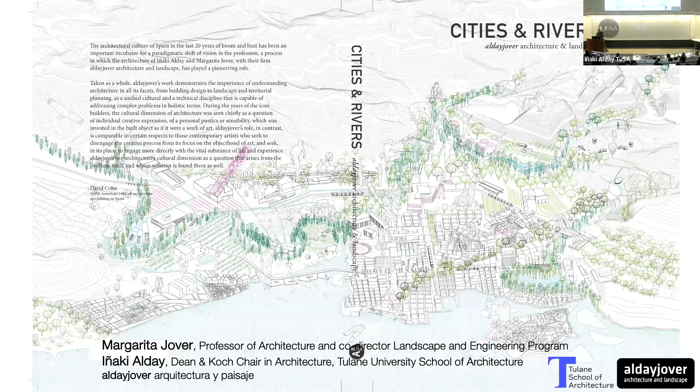Okay, so this is where we are coming from. Margarita and I are complementary in many ways. Margarita is coming from Barcelona and Cameroon, where one of her memories is the space of the sky, the bolt of the sky, how the Central African space outside was covered by this amazing sky bolt. And I'm coming from the desert, very different to Miami and to New Orleans, desert in the center of Spain, Monegros, near Zaragoza, landscape also shaped by water, because this is actually a river, a dry river that is cultivated and with devices to stop the erosion.

We are now in New Orleans in a different climate, very similar. We were enjoying the rain this afternoon. A place with a lot of challenges like Miami, with I think it's probably different that you can have here foundations somehow. In New Orleans, we are in a kind of flan caramel in which everything moves. It's a challenging environment. We have an earthquake every time the trash truck goes through the street.

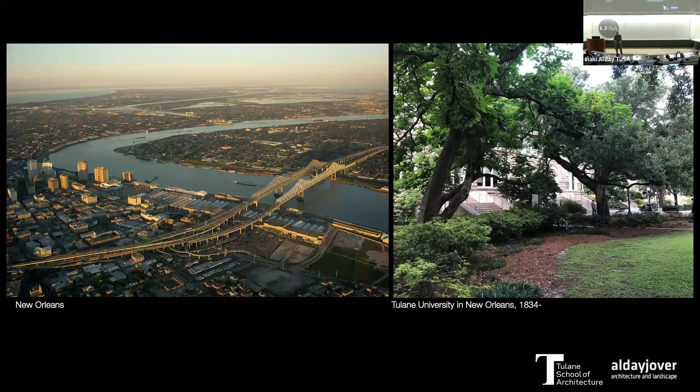And then we teach at Tulane University, a kind of cousin of Miami University School of Architecture. We feel very close. And we keep our practice in Barcelona, in an old palace of the 17th century in the center of Barcelona. Our office is on this level. A very interesting place because it's the only palace in Barcelona in which the family still lives there.

And we are helping in the restoration of all this. So it's a kind of new, changing environment with deep anchors that we don't know yet how it works. And we are very interested in the materiality.

We started as many architects working very abstractly with the offices that we worked for, Margarita Jover with Pepe Llinàs, I with Martínez Lapeña, Elias Torres. But we got very interested in materiality very early on and in getting things built. That's something we have always done. Our work is through competitions, but always ideas competitions for being built, not ideas for the sake of ideas. So the exploration of material, the exploration of structure, and the exploration of programs and programmatic assemblages.

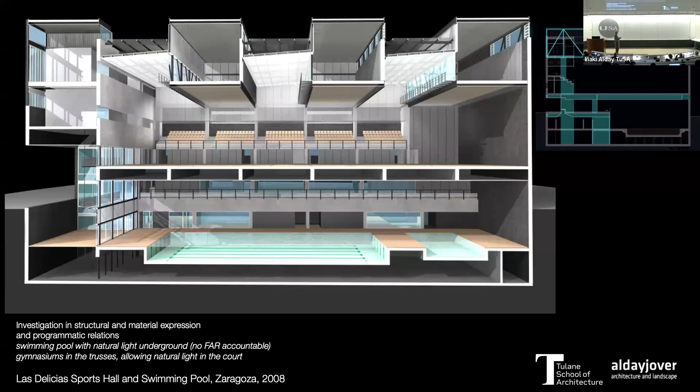This is a building in which spaces are interlocked in order to fulfill the program and the structure. Sometimes exploring and taking risk in structures and in construction.

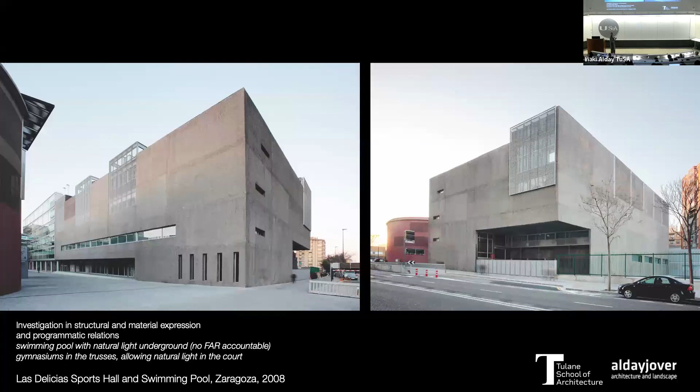This is a very big building. As you see, it's made like almost a model, with very thin feet and a little bit more walls made of concrete, with these textures to create a building that has this size and this presence, with this kind of abstraction with a strong materiality, something we have always been very interested in. And this resonates with our godfather in architecture, a very well-known Spanish architect who is our dream, Alejandro de la Sota.

And this exploration in materiality comes probably from our first project, which Margarita will explain, in the river and the materiality of the river. But we try to work with this materiality in the public space and how materiality in public space is able to organize programs, people, and perception.

So our focus is on this continuity between the building and the public space, and understanding that public space is the place of democracy, the place where people gather together, independent very often of socioeconomic status, the place of freedom.

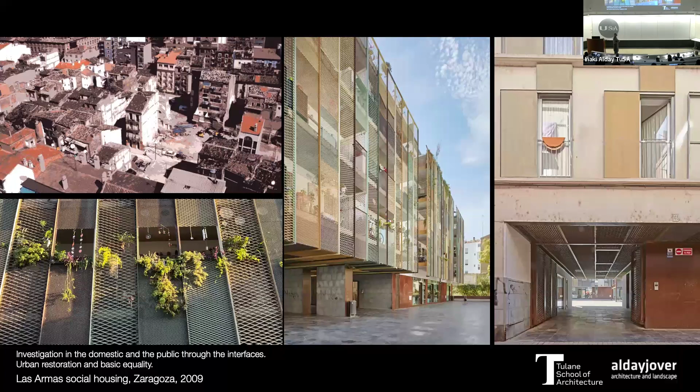We talk about designing chessboards, but we are not designing a monopoly. We are designing chessboards in which you can play many different games. So people are, in the end, the ultimate client of us. Even when we work with a mayor, our client is actually not the mayor, it's the citizens of the city. And often we have gotten in trouble with that.

The other issue that we are very interested in is housing and affordable housing. Early in our career, we did a couple of single family houses, and we decided no more, enough family houses in the world, and that we were going to focus on affordable collective housing. And in some cases with a very clear ambition of exploring the interface between the domestic and the public space.

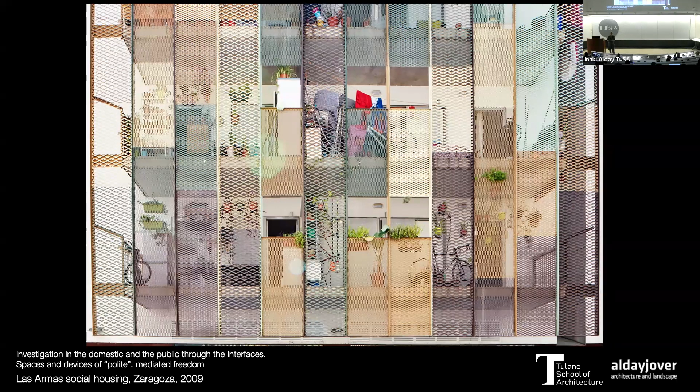So here you have an image of the old part of Zaragoza, a city in the center of Spain, very damaged, very degraded, as you see, and buildings that were going to be filling spaces. And the interior becoming a square, and the relation between the space of the square through this kind of mediation of relation. So we are very interested in how life shows up, but how you have certain control of life in a way.

Because sure, every one of you have a lot of things that do not feel at home, do not fit at home, that you need extra space for. And then you have to put it somewhere. So balconies, terraces, backyards are the places for that. So the effort is how you create something in which people feel free, but are still polite and are still part of this kind of mediated freedom.

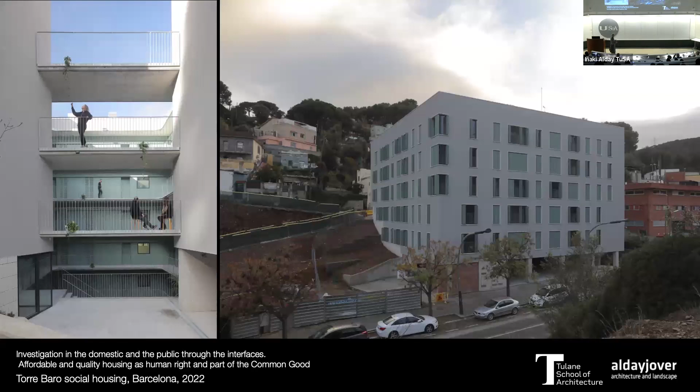So this is one of these experiments on that, or this other recent public house, affordable housing, in which again it was about working and seeing if this works.

It's about working in the public spaces inside the buildings, and how these spaces are spaces of relation. Here you see a little video from Instagram of the day of giving the keys to the new owners, and it's kind of fantastic, because these kids were like, 'Oh, this is our new house, this is our new apartment.' So they were so excited, running from one place to the other. At the end, this is what we as architects, landscape architects, and urbanists focus on.

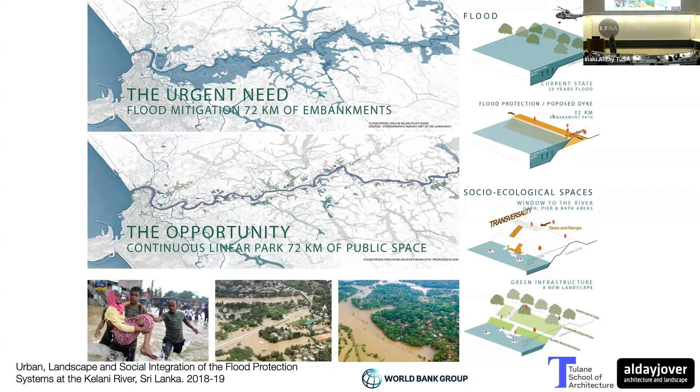Our citizens, let's say. In this work, I'm going through some ideas before entering into projects. We started to work for international organizations. This is a World Bank project, where we are also consultants for this kind of work in public space, infrastructure, and water. We were called because they were doing an embankment, and we transformed that idea into a long linear park for the city because of the problems of infrastructure.

You will see in the projects we explain that we have been working on water and river dynamics for many years since our very first project. So how we can deal with rivers that are, in Southeast Asia, super strong, and how we keep the relation between the people and the river, keeping the people safe — which is something you cannot forget. We cannot be fundamentalist in terms of keeping the integrity of the river. There's the integrity of the river, and there's the people.

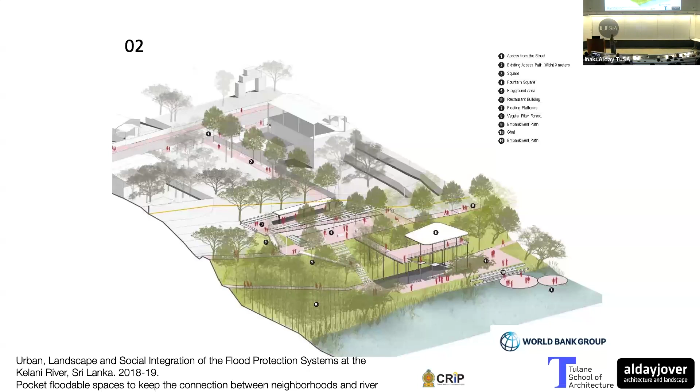So how to find floodable spaces that are part of the community and the neighborhoods nearby, and then how to do urban planning in order to avoid gentrification. The moment you have protected the areas that are floodable, where the most vulnerable people are living, when they stop being floodable, there's going to be a gentrification process. How do you plan in advance for that not to happen?

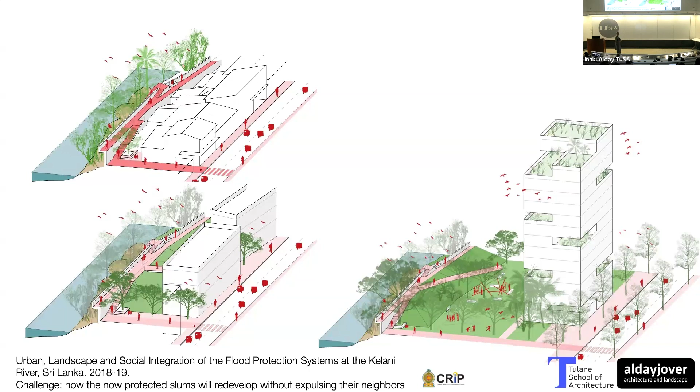These are some of the concerns we're dealing with at many scales, in which the human dimension is critical, because we know we are in a crisis here in Miami and in New Orleans. We know it very well. We deal with it on a semester basis, and we know that the people who are most vulnerable are the ones dealing with the catastrophic effects of storms, of floods, etc.

Of course, many people are dying every year in countries in Southeast Asia, in Africa, but also in Germany, in Central Europe, and all over the world. So it's not a problem that is like, okay, these are poor people dealing with it — we are all in the same issue, no?

So, extreme weather — this is 2016 in Paris, the first time the cellars of the Louvre were evacuated and the artwork taken out. The first time since World War II bombing by German planes that this happened, because the Seine overflowed its banks. So, German bombers and the Seine River — as dangerous for the museum, both similarly.

But these are news from Yellowstone just a couple of years ago. So we are all in the same situation. What we have realized is that we don't have a backyard anymore. We had thrown stuff into our backyard for many years, and now we have discovered that we are in, as Jedediah Purdy describes, a three-fold crisis about ecology, economics, and politics. We've realized there's no rebalancing system — we cannot keep expecting things to go back to where they were. Because we have been using our backyard, and now our backyard is fighting back, and we are realizing what's going on.

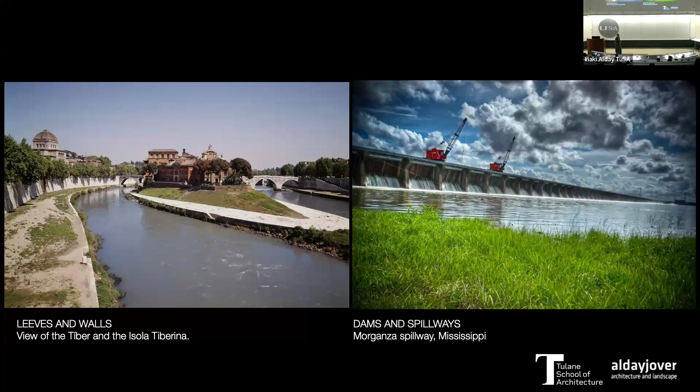The river is the reason for cities to be placed in almost every case, but at the same time it is the danger, the resource, and the threat, the two things together. This is how we have historically dealt with rivers in cities. This is Rome, a river that is walled, an island that looks like a ship, big infrastructures. This is the Morganza spillway in the Mississippi. Huge infrastructures and huge catastrophes. There are other ways to deal with this.

The Dutch have been working on this model, what they call room for the river, for the last 2008 to 2018, with the idea that instead of keep raising the protections, you widen and give more space to the river. That motto, room for the river, widening or increasing the capacity, because half of Europe drains through the Netherlands. The other half of Europe drains through the Danube to the Black Sea.

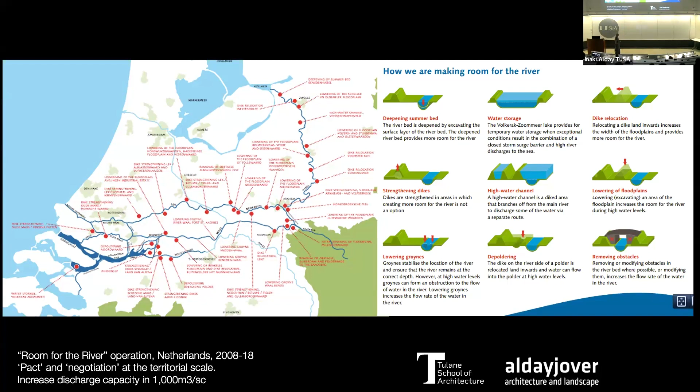So I'm going to stop here and let Margarita take the next.

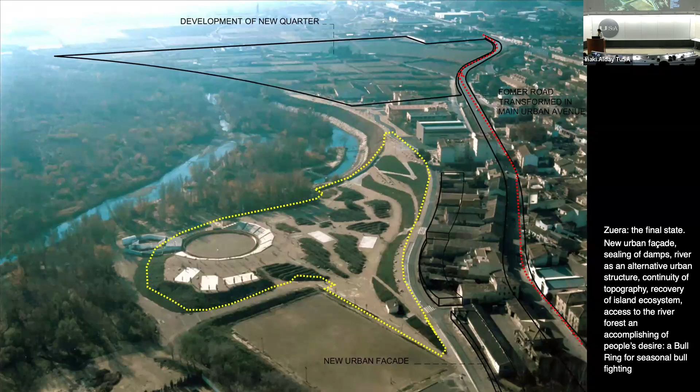All the area along the river was a giant backyard with garbage, washing machines, car wheels, etc. Served by this road you see in red, a series of facilities were placed at the edge between the town and the river. These facilities were accessed from the road in red with their back at the river, a classical situation that occurs everywhere. So the project is then a multi-scalar, multi-temporal set of strategies to transform this backyard into a front yard. Let's go and flow it here.

So the project began in 1996 because an association of bullfighters wanted a facility in the yellow circle, where finally the sport hall was built. We as designers, architects, observed by looking beyond the site at the city itself - doing this typical zoom out - that the plot was almost the only open space available between the town and its river. Building in this place was not a very wise decision for the future. We didn't know what to do, but we knew what not to do.

We knew that responding to the client as service providers to build this bullfight arena on that place was not the right solution. Visiting the site and the city several times, we learned quite a lot in relation to floods, drainage, dominant wind, landfills, sewers, etc. And we decided to propose an alternative location and typology for the building.

So in blue, you see where the rented bullfight arena was located every summer, and in red is what we ended up proposing. Instead of a building with facades on a given plot, acting as an architect who is a service provider for the needs of a client, it seemed more appropriate to propose an amphitheater open to the river dynamics without facades. This obvious solution took 5 years, because we had to convince them to tear down dikes, etcetera, and to integrate this building into the restoration of the entire waterfront of the city.

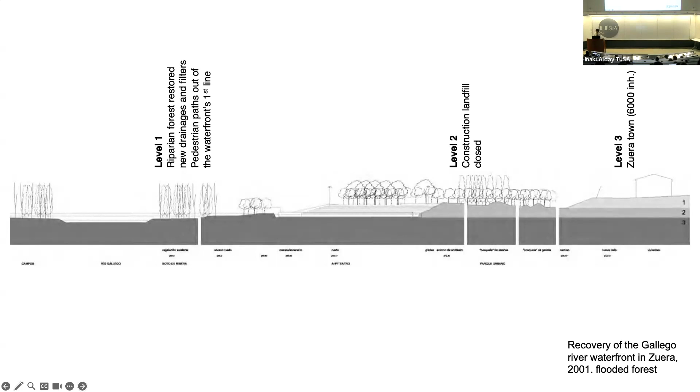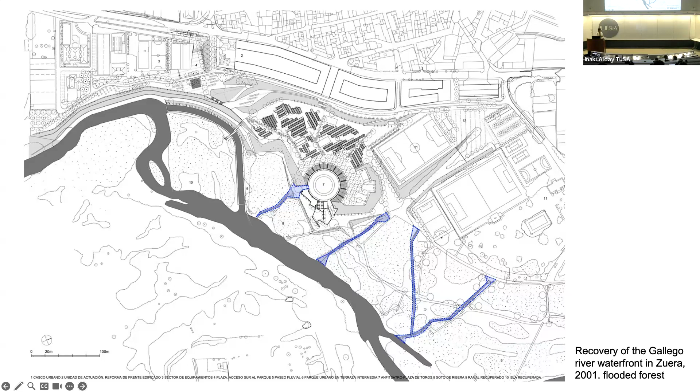So these drains are draining towards the river, and they are planted with filters of trees that reduce the energy of the flood as it comes down, in the image from bottom to top.

In those seasons it gets flooded, offering a lake to the park's users. And of course, in summer it is the receptacle of corridas and bulls and toreros, as we've seen already in the previews.

So looking at architecture as part of the territory means to understand well urban issues, topography, drainage, the water cycle is critically important, and the social agents that operate within. So people's dreams and resources and natural dynamics and the very matter of life.

So for this project, cohabitation with floods in a productive manner was our aim. I wanted to highlight here a piece of text written by bullfighter, artist and painter Luis Francisco Esplá, who writes in the book, in his essay, that he's obsessed with balance.

He started as a bullfight person playing with karate and judo, and he was obsessed with balance and this idea of the relation between humans and animals and this intuition of balance.

In this text he says: if I have started out by speaking of balance, it is because with this intervention, where the tremendous allegorical charge of its elements would guarantee serious conflict in advance, the voice of Solomon calls into being the harmony of a perfect braid, architecture, symbolism, and nature. Perhaps the success of this communion lies in the sagacious modesty with which the project is built.

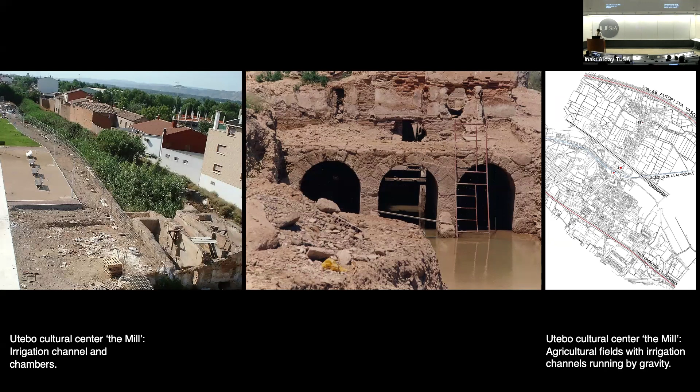It's a place full of irrigation channels that worked for centuries, operating by gravity, just like the flow of water to irrigate the fields. This is the site of this ruined old mill that worked for centuries to transform wheat into flour. Zooming out, we see the town is somewhere in this large agricultural field.

Zooming back in, the competition brief asked to transform the space into a cultural center. The proposal aims to keep the material memory of earth, extending from the old building to the new one and beyond to all public spaces around, making it feel as though the surroundings themselves were excavated into the earth, as you see in the section.

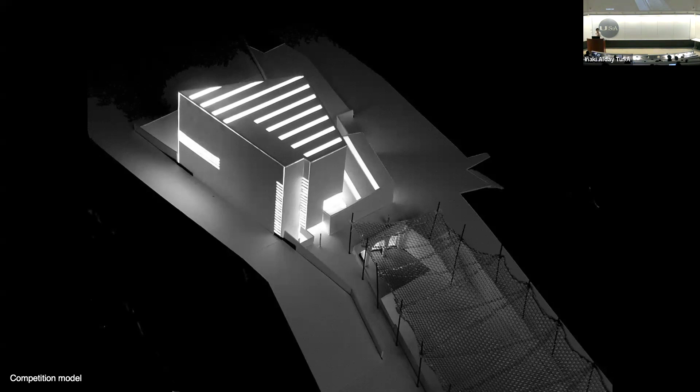The competition model strives to achieve some kind of shy monumentality for this small piece, to make it feel special in a context that is the middle of an urban block full of housing, and it's really small. But the idea of monomateriality and excavation, as if emerging from the earth, makes it, we thought, silent around, by provoking this sense of shy monumentality.

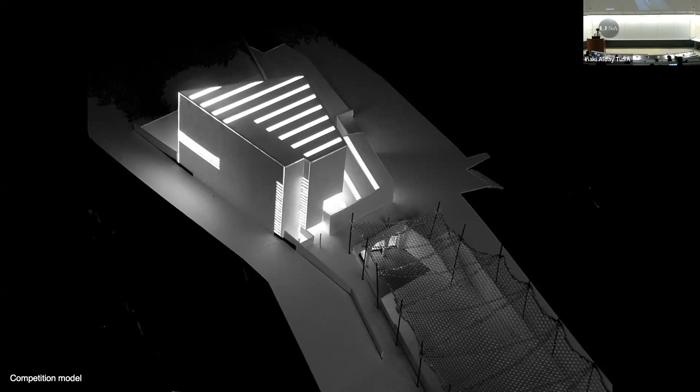The abstract volume takes extreme care in framing windows that are not connected to human scale. So the important aspect here is to have windows that don't reveal which scale it is. A building made out of a massive material, tinted concrete with a texture of canes and high joints, aims to amplify the perception of monomateriality.

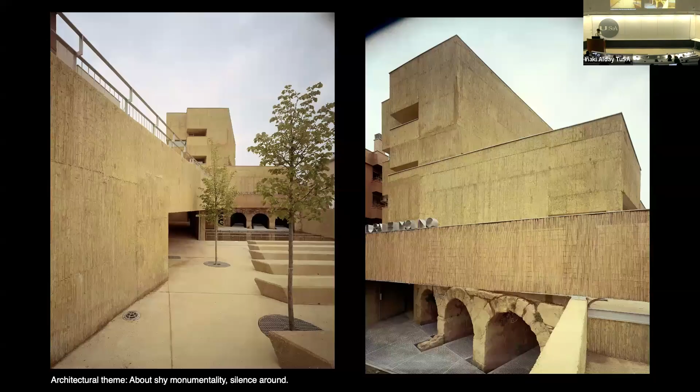As expressed in the drawings too, light comes from the northern orientation, often especially in the roof, with small apertures to save shadowy light from the inside. Windows that are void, again, against the immense scale, attempt to make the perception of scale difficult and preserve its monumentality in a context surrounded by mundane domesticity.

The structure is made of concrete that acts as a shell, making possible the horizontal windows, as you see in this diagram. And from the inside, the building is shiny and smooth, as if the water has eroded it.

And from outside it's like a geode, textured, vibrating with the light of the day, claiming its space in time - past, present, future. Inside you see this shininess, and outside this vibrant set of shadows.

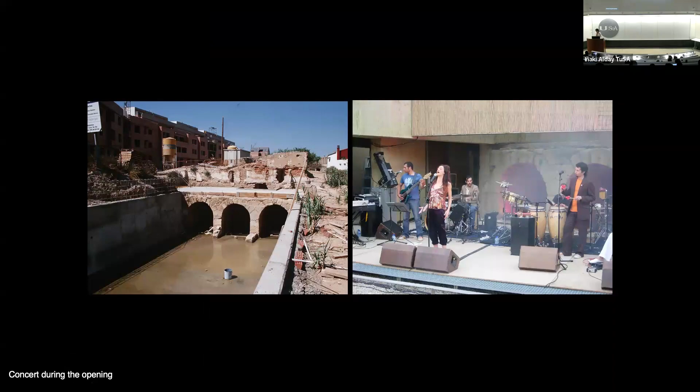So a transformation of the old building, celebrated here on the day of the opening. To conclude with this specific building that is obsessed about marking time, I guess it's the influence of landscape architecture into architecture in our practice, and the role of materiality.

That's from David Cohn, an essay by a North American critic of architecture specialized in Spain, who writes: in Alday Jover's encompassing approach to design, the site is no longer the tabula rasa of the technician. It is a palimpsest replete with traces of the interactions of human history and culture with the natural habitat and the givens of geographic circumstance. Any new intervention simply joins and modifies this accumulated natural and cultural history.

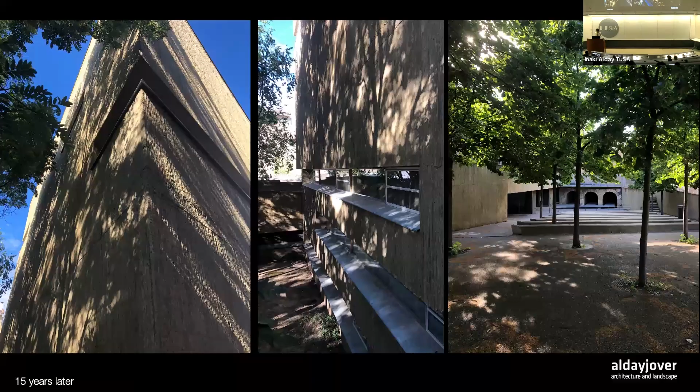Here you have the last slide of that second project, 15 years later, when this forested plaza in front of the old ruin comes alive, because the shadows tell the time of day. The old ruin has fertilized the space around it, making it one piece that has grown in scale and converted this old ruin into a larger, earthy site. So that's the two first projects.

I can hand over to my partner. Thank you, Margarita. We'll continue with another project, the next from the Zuera riverfront of the Bullfight Arena, that was working in...

We realized that our site was visible from a satellite. So we were very scared, because if we messed up, we were going to mess up very big, since you could see the mess-up from a satellite.

But most important, we realized that while the competition was asking for an urban park as part of the city and the International Exhibition of 2008, going up in the satellite made us realize an obvious thing: that this piece is more part of the river than of the city. So our first decision was that we need to give back to the river an important part of it, because it's more part of the river than the city.

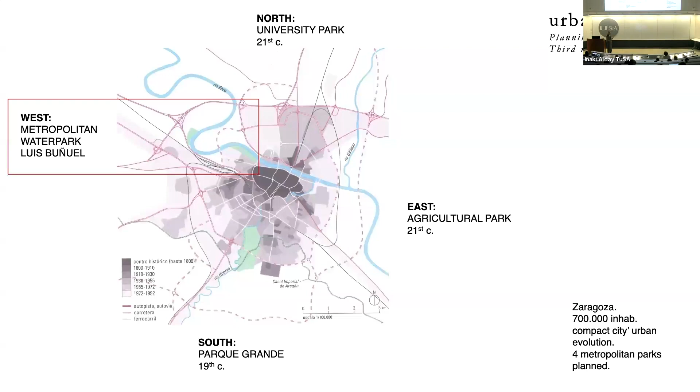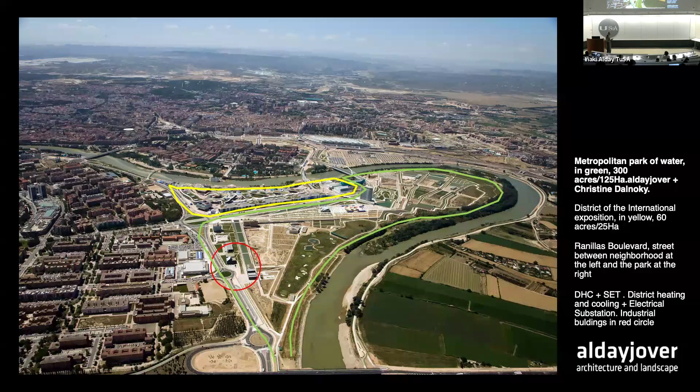This is the growth of the city of Zaragoza over time, and this was the new piece of the meander for the international exhibition. This meander had a road, the third ring, that was stalled, not built, because of the conflict of how to build in this meander. The final decision was that the international exhibition was placed on 1/4 of the meander, while the other three quarters became the water park, this international exhibition associated park that we won in competition—a 300 acre park, a huge piece.

The first thing that we did was think of the project as giving it back to the river, and think that the space of the park was going to be defined by the forest around—what we call the silver forest. Here you see some of the trees that were already there, and the recovered growing forest that is starting here.

It was a very big project, very fast, and we did it in various phases. The first phase was the forest, actually, not the inside. This is in the first year of construction. We finalized this. Everything was messed up in the rest of the meander, and the river was doing maintenance already of that. So all this area was basically given back to the river and to the dynamics of the river. This is an interesting photograph, because it was taken one week before the opening of the international exhibition.

In 2008, one week before the 14th of June, it was a national crisis because it was called the International Exhibition of Water and Sustainable Development, and as you see, part of the grounds of the exhibition are flooded. So it was one week, and all the newspapers in Spain were asking, what are we going to do? The International Exhibition of Water is flooded. It was a national crisis.

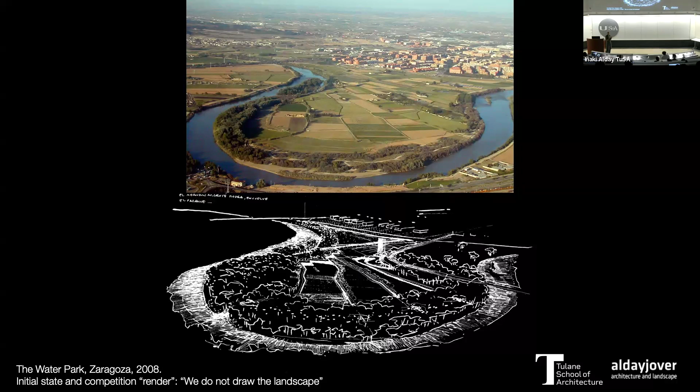So here you see all the traces are still here. Of course, we widened the canals and changed the use of the plots, but all the lines of the territory continue being there, which helped us avoid making mistakes—for instance, tracing canals against the dominant wind. We didn't do that. We kept the farmers' knowledge. They knew. We didn't know, but they knew. Or messing up with the soil.

So this is all the piece that was given back from agriculture to the river, already growing very quickly, and the dike, the main dike of the farmers, that we kept as a structure of the park. Then all the system of small ditches were widened and transformed into recreational spaces, and every one of the plots is now reused as part of the park. A critical piece was to take water from the river and from agricultural ditches and clean it through green filters to be able to use them for recreation and even for swimming. So this is a public swimming pool with water that is treated through the green filters there.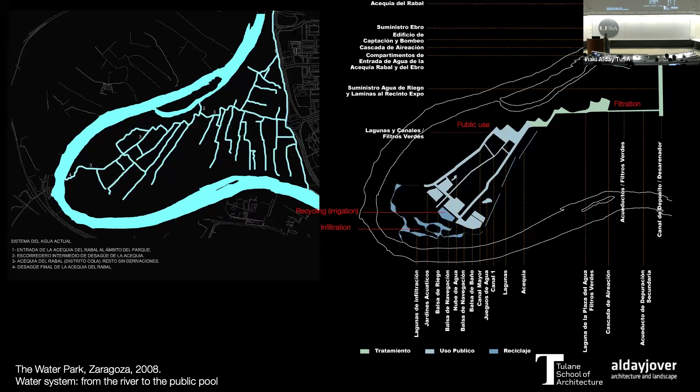So this is the original structure of the meander drawn by the farmers through the ditches and the irrigation, and this is the new structure of a big canal, reservoir, filters, and canals that are now in a wider shape and volume, with some of the plots excavated as lagoons. This is the very simple strategy of cut and fill, from this small ditch to a larger canal to be used by people, and this allowed us to make this simple operation that helped manage the winds.

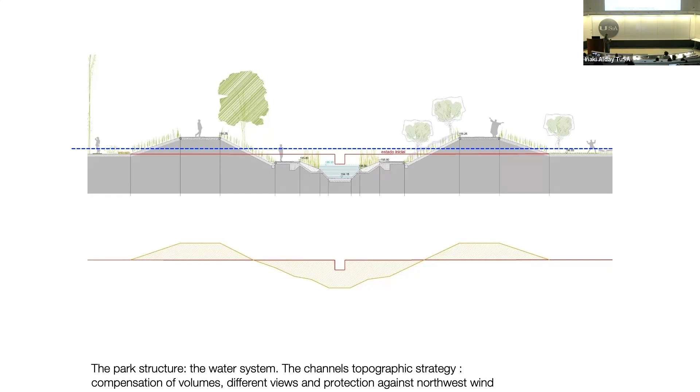The perpendicular dominant winds that are very strong allow you to be protected inside this low ground—spaces of treatment, and this is water coming from the last treatment piece to the usable spaces. Nature taking over bridges and everything.

Plantations keep the quality of the water along the canals. The first time we saw a swan here, we were terrified - what is this horrible plastic swan doing here? We would love to have a nice wooden something instead. But after a while, we decided: what else can you ask for? People are really enjoying the swan, having more fun than with anything else. So please, more swans in the canals. In the end, even if it looks kind of horrible, people have fun - this is why we do this.

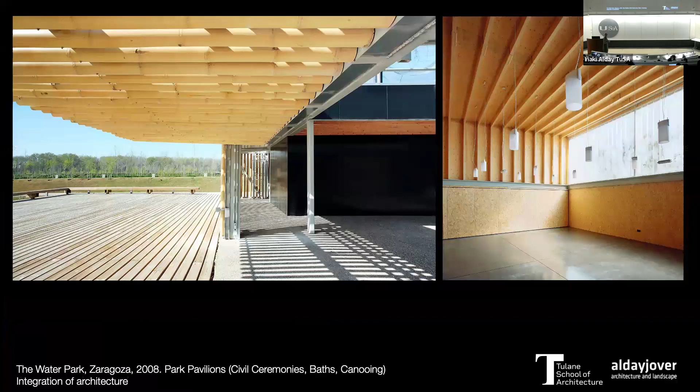So the architecture, we did 8 buildings in this park in just 3.5 years - architecture that is very permeable, very light, allowing water and wind to pass through.

This is the ceremonies pavilion for civic, non-religious weddings, a building built inside the water, inside the floodable area.

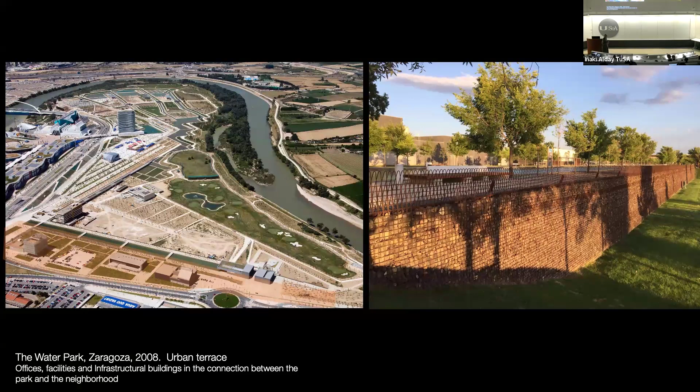So a completely different way to manage the relation between buildings and water, compared to the bullfight arena or the light pavilions. An important part of this was reorganizing the facade in an urban planning operation, with different facilities on top of an artificial terrace mediating between the neighborhood and the park. One of the challenges was that there were several infrastructural buildings, and this was the most challenging of them.

This is a power plant. Typically a power plant is spread across an industrial site with different volumes, and it's typically a problem of urbanity. In this case, it had to be part of the city and part of the park.

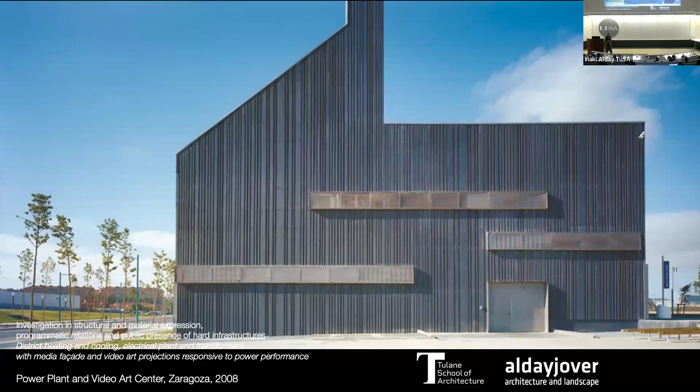So we designed a power plant that could be visited by the public in a safe way, but also function as a video art center communicating with the public and citizens around it. So it's a very abstract building - it could be anything. In this case, it's a power plant with a really fun and interesting program.

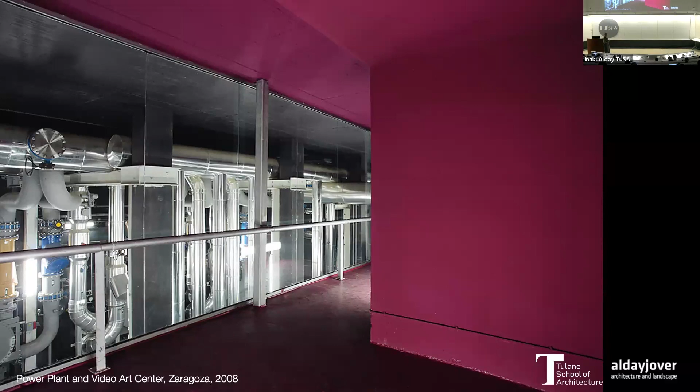It's placed in 3 levels with a huge reservoir half underground, with a safe path for people to visit and see what's going on, because it's part of the neighborhood. There are big heaters like 18-wheelers on the 3rd floor, and an area that can explode at any moment, so it has to be light.

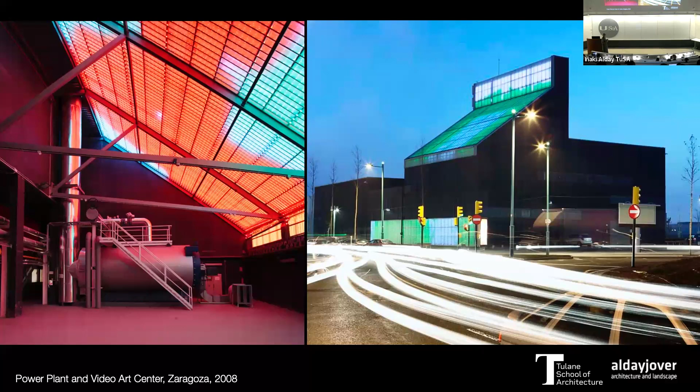This area is a media facade that projects videos - artists make videos connected to the performance of the power plant. This was done in 2008 as well.

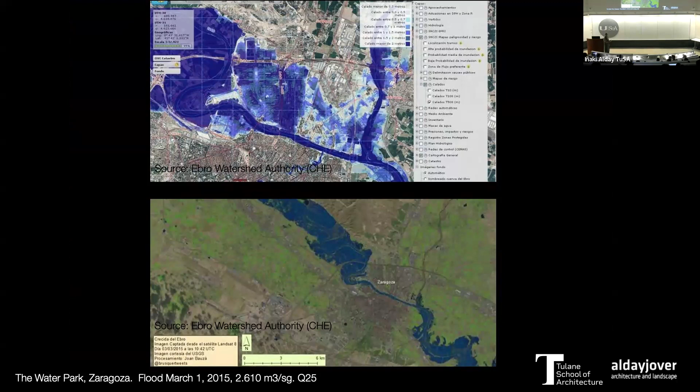We also discovered floods we didn't expect - water table floods, where the area protected from the river floods from inside. These are 10 centimeters over the level of the paths around, and we even realized there were islands forming because of the push of the water table.

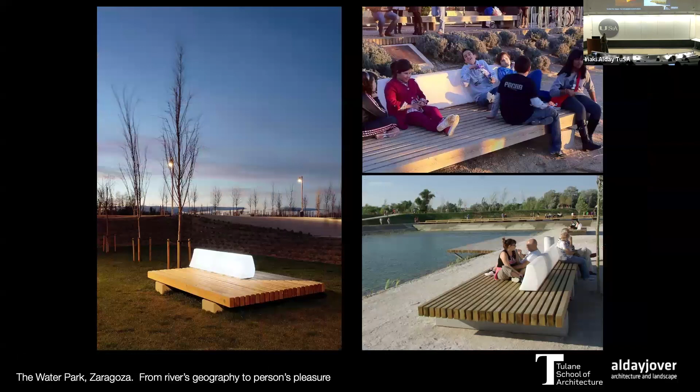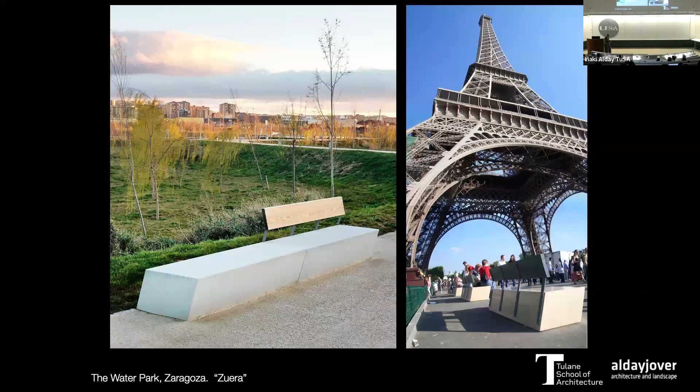But most important, all this is for the people using the park. So when we work in this satellite view with these big floods, we're also thinking about the people enjoying the park. These are the benches we designed for the water park. We call them lovers' benches because this was the area of the city where lovers used to meet before the construction. We also designed some benches for the other project in Zuera that are in the water park, but also at the Eiffel Tower, because the French think tourists are as bad as rivers when flooding, so these are very resistant benches.

We are going to do one more floodable park in Pamplona. This was the third of our series of built projects, and in this case it was a very different situation. We had a river that was very much inside a channel, and an agricultural meander that had become part of the city, surrounded by the city, with a very important value. There's a lettuce endemic to this meander, so it has an enormous cultural value besides the food production.

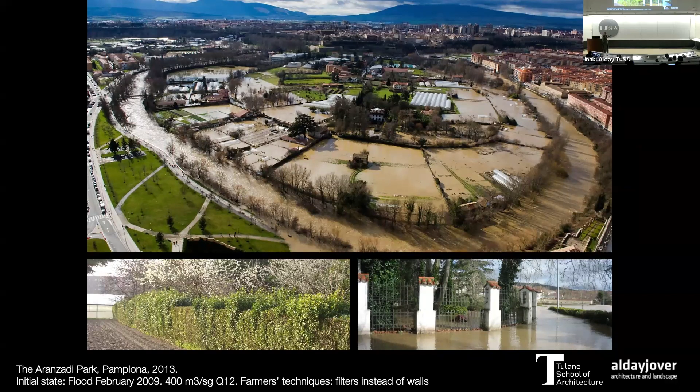We learned from the farmers that you don't want to protect with walls, because once the water goes over the wall, it becomes a cataract, a waterfall, and damages everything. So what they do is create bushes that filter the water, filter the stones, the washing machines, the tires, everything the flood carries, and let the water go through, because the water is actually good and fertilizes the land. We learned that from the farmers there.

We found that this is the original flooding state, backwards flooding, until it goes over the limit of the perimeter and everything gets flooded. The farmers talked about what they call the inner river, a lower part inside the meander. So we thought that connecting the inner river directly to the river would alleviate floods, not only in the park, which doesn't matter, but in the neighborhoods around, because it would give more capacity to the river.

So these are the different scenarios in which at some point the park floods equally. But the critical operation was the creation of this floodable forest, excavating parcels of land in order to protect the most delicate parts at the edge of the meander and to give more capacity to the river. This is the first phase. The second phase, to be finalized here, continues the floodable forest and the protection of the most important agricultural pieces at the edge of the meander.

So we're increasing the capacity, not by widening the river, but by giving it another new, temporary river. This is how it works. As you see, now the second river is in action, is full, and we are diminishing the flood here, but the important thing is what we are avoiding the flood here. That was typically an area that was heavily flooded, so with this extra capacity it changes.

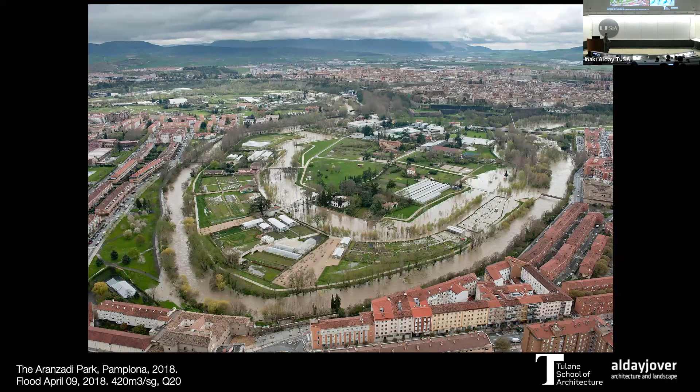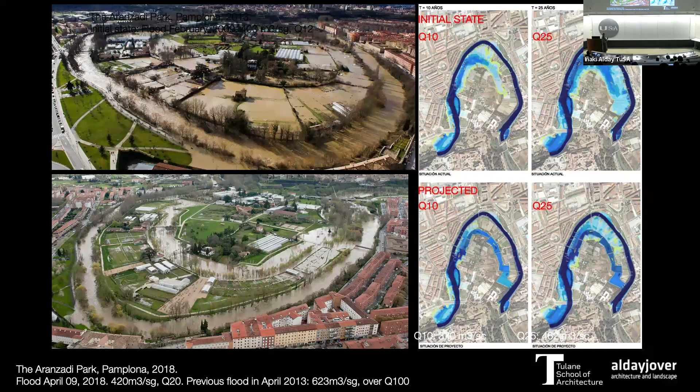So the public space here is again an infrastructure, but not a social infrastructure or metaphorically an infrastructure—it's actually a water infrastructure that increases the capacity and changes this kind of flooding into this new performance of being part of the river. You see the comparison of the two floods side by side. Of course, this floodable forest is for people 300 days of the year. People come here to study, there's Wi-Fi, to have picnics, to hang out, and from time to time it's part of the river.

So when the river arrives at this level, it goes over this and enters laterally along this line. So the design of the bridge and all these pieces is to help the water move, drop all the stones, big trees, and debris like washing machines, because once the flood comes, you're never sure what will happen. But the objective is this: here you see the floodable forest full of water, and the goal is to eliminate flooding in the rest and avoid this situation.

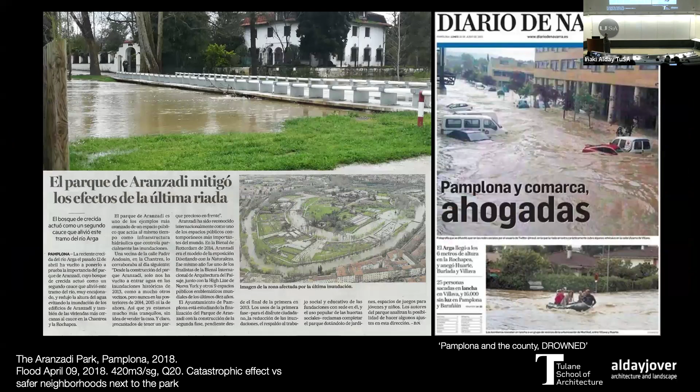We are going to continue with water and projects of public space, planning and infrastructure, Margarita. Yeah, from floods in public space to another type of infrastructure, a metropolitan green forest around the city of Madrid. That's another competition we won, which we did during COVID 2020. The ambition is a green metropolitan forest around the city of Madrid.

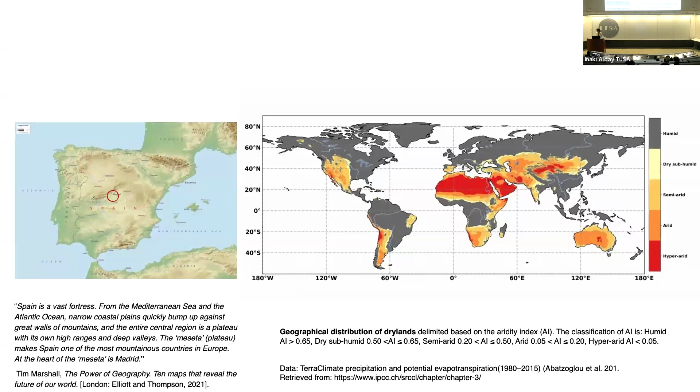To the left, you have the map of Spain with Madrid, the capital, at the center in this red circle, inland in a highland plain called Meseta. The interesting thing is that it's at the foothills of a permanently snow-capped mountain range called Guadarrama. The prospect of climate change in Spain is transforming the country into an increasingly arid one, as shown in the IPCC graphs to the right.

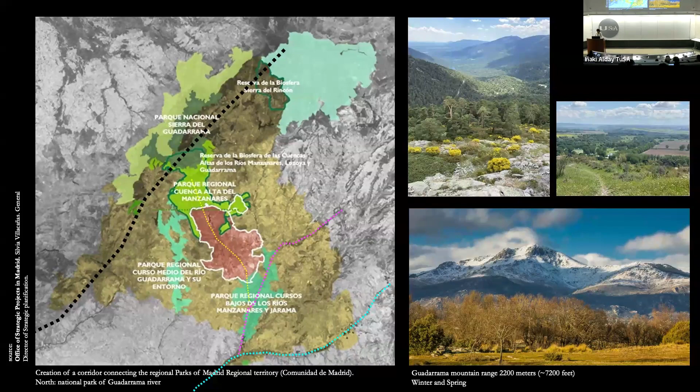So the new green belt is 32,000 hectares, and it's meant to contain the city and connect it with large natural parks around. It's part of the European strategies for mobility reform to decrease CO2 emissions.

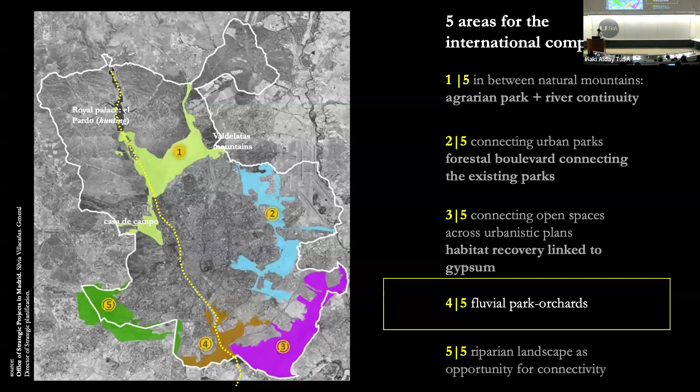If we zoom into the municipality or metropolitan area of Madrid, we see that this green belt has different parts, with different competitions for the different lots. We won number 4, which is essentially what I'm going to explain, this area here.

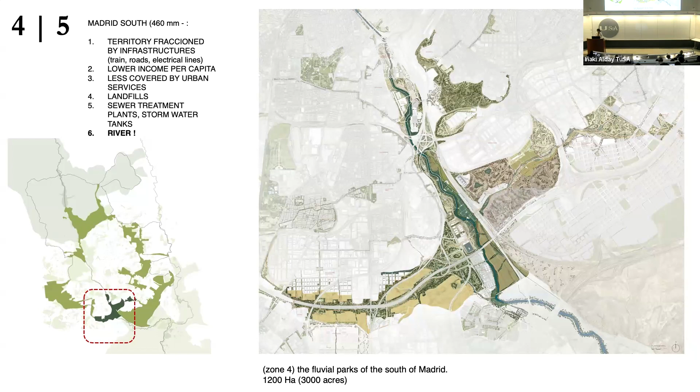The project has essentially 8 basic ideas that move through time across different types of projects - planning, architecture, landscape, etc. They run on different timelines, but the project essentially carries only 8 ideas, shown in this area here. The first idea is that the sewer treatment plants of the city will become new springs that feed the irrigation of this green belt. So the sewer treatment plants are suddenly a big resource of water.

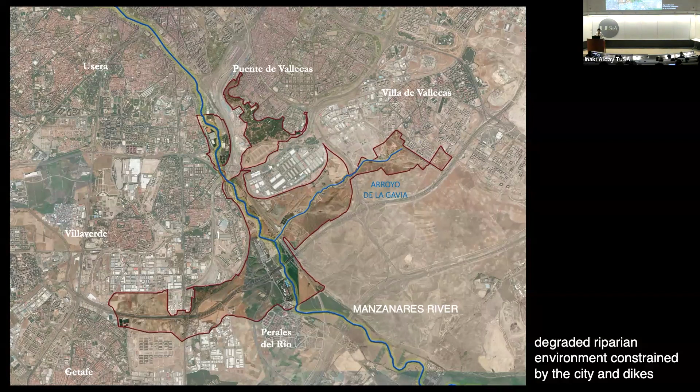In Madrid it rains only 18 inches, as opposed to 64 inches here in Miami, so it's really little rainfall. So how do you make a park without water? The water comes from the sewer treatment plants - that's the main principal idea out of the 8. With that, this regenerated water normally flows back into the river, but in this project, we take part of this water and build an irrigation infrastructure using drip systems that allows the forest to grow over time.

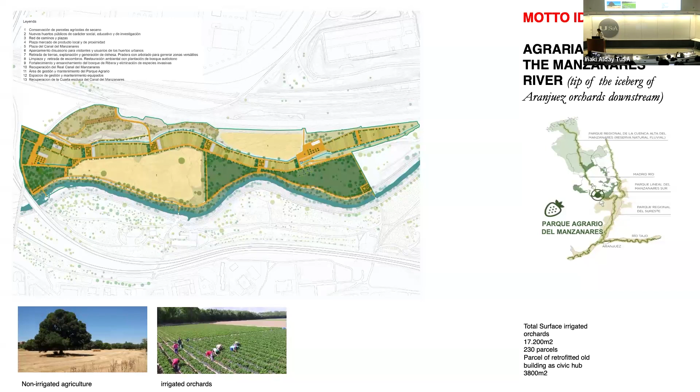So citizens can engage in cultivation of food in close proximity to the city. And that involves recovering old buildings, having new small buildings, pavilions, and things like that.

The third idea, on archaeological and architectural remains, is to restore and recover a big navigation canal of the 18th century that exists semi-sunken there. It was built to navigate upstream the river and connect these large orchards downstream of Madrid to the central markets in the city, and also to connect the city of Madrid to the Tajo River, which connects to the Atlantic Ocean.

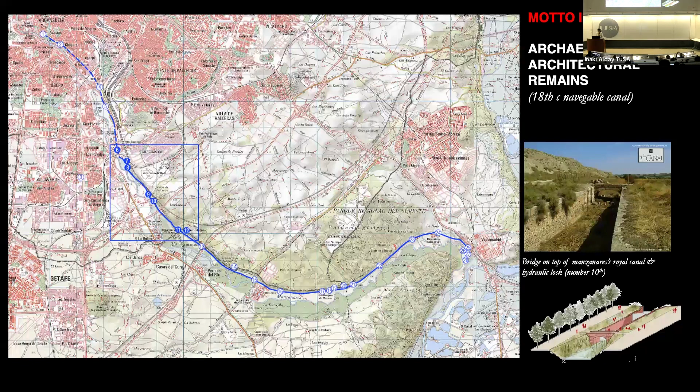The fourth idea is to recover cattle trails and push for slow mobility infrastructure, so people can move with a donkey or a horse from the park to a bus stop, and from the bus stop to the subway, and subway to home. So it's the interface of fast mobility and slow mobility, intermodally integrated, pushing to recover this slow mobility infrastructure.

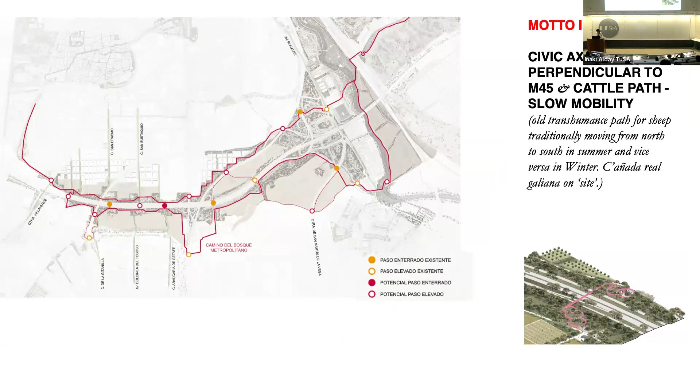The fifth idea, out of 8, is to promote transversality between the ring, which is circular, between the city inside and the forest, transversally, with all kinds of bridges underneath and above the highway.

And the sixth idea is to look for places of opportunity. In this case it's an electrical substation, a place of opportunity reconverted into a social hub with new facilities.

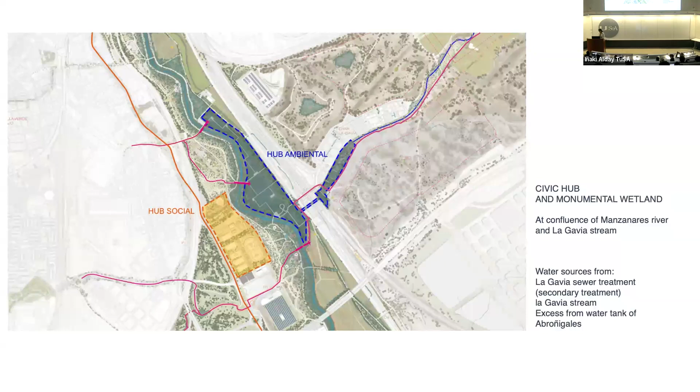Along with the social hub, there's a huge monumental wetland, a new landscape infrastructure that holds water from the sewer treatment plant in an intermediate territory before it reaches the level of the river. So it's a water park for the neighbors, at the metropolitan scale. It looks like that.

The seventh idea, of course, is that we have different teams of people working in this huge forest around the compact city of 7 million people.

So we had discussions among ourselves on how to design this palette of forests that will be more or less homogeneous, determined by soil conditions and access to water. This palette is agreed upon by the whole team, across 6 multidisciplinary teams, to construct unity across the metropolitan forest.

The thing here is to go beyond restoration. So it's not just an ecological restoration project—it's really important to design this reforestation to beg for the citizens' care through the interface of beauty. The framework of plantations and the species provided through the project is critically important to understand, since this is not a natural territory but an artificial one that has cultural values, etc.

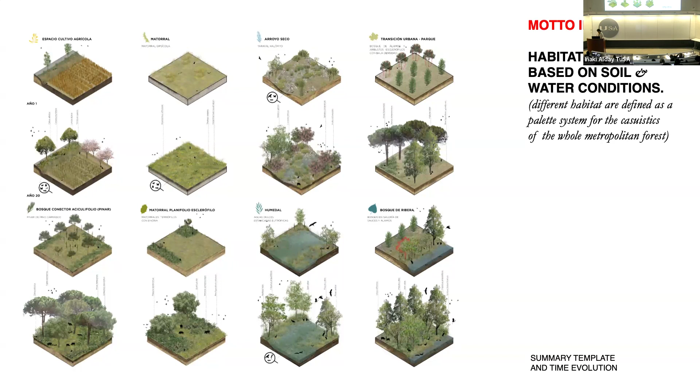So we are in this design phase of the forestation, an artificial forestation with different patches of different forest types depending on the conditions.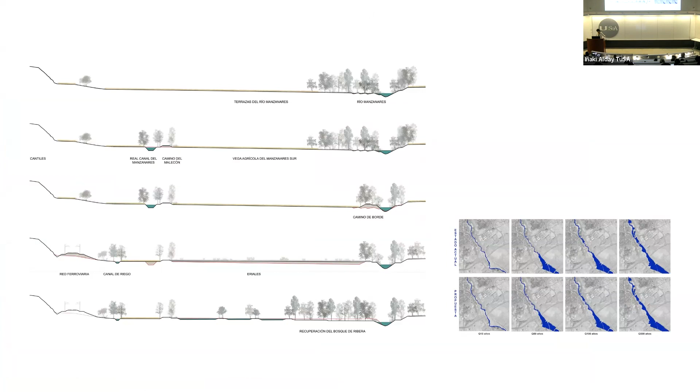And the last idea of this project is, of course, to take down dikes and make more space available for floods, so the natural flow of the river is self-maintained, as you see here, before and after. This increase in flood performance is studied to the level of detail of floods staying there for several days and then changing conditions for species to emerge.

So it's a guerrilla-mode project that has several scales at several speeds, but it has the same ambition: to build part of this metropolitan forest for the city.

This project is also part of a reform of CO2 emissions—forestation, carbon absorption, but also lowering CO2 emissions through rethinking mobility, via the slow mobility and intermodality we just passed through quickly.

And the last project is in Barcelona—it's also a linear park, reconnecting the city, one of the densest cities in Europe, to its geography and its territory.

This is the Sagrera project, an axonometric of the city of Barcelona with the latest large-scale urbanistic transformations. We have the end of the Diagonal, a 2004 project, etc. But here, the important thing is that it's part of

high-speed train infrastructure. The blue line is the tunnel underneath the city—the high-speed train that connects Madrid to the large network of high-speed train infrastructures in Europe, like Paris and Frankfurt. It passes underneath the city and moves into the Sagrera station side.

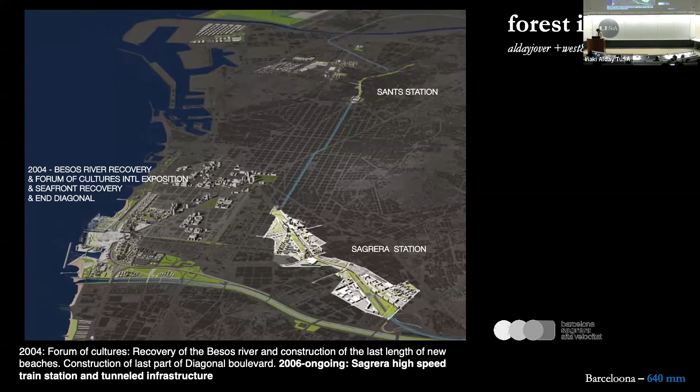The wise decision of the municipality was to say: if the high-speed train is coming, don't build it into Sants station, but into Sagrera station, the new station, and take this opportunity for new investment to solve problems in the neighborhoods across the Sagrera area.

So the client is the Barcelona Sagrera high-speed train company, which is a private-public agent.

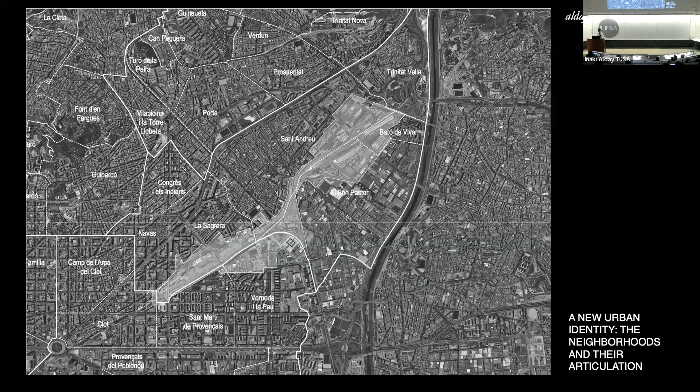The team we put together was Alday, Jover, RCR, and West 8 to design the Sagrera Park. That is the only park where you cannot build a piece of city—it's a park on top of the roof of the sunken high-speed train infrastructure. So it's a large multi-layered project with urbanistic development and infrastructure, but our park is only the linear park that falls on the roof of the train infrastructure. So we have three main ideas.

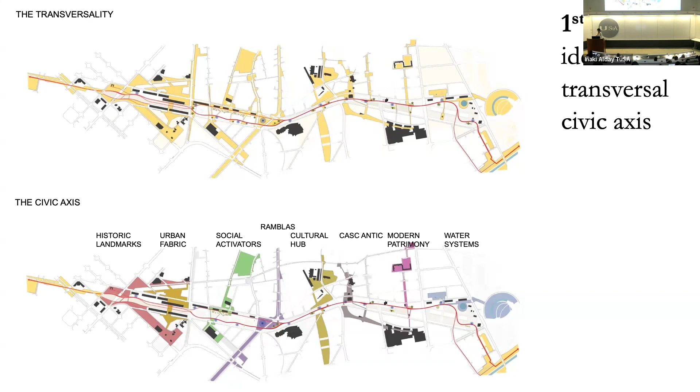The first one, obviously, is to strengthen the transversal connections across the neighborhoods by connecting different civic nodes and having this series of public spaces traverse the long linear park of 2.5 miles.

The second idea goes beyond the site itself, outside the limits of the project, advocating for what we call a green diagonal of slow mobility—a crack in the city that aims to have a green slow mobility infrastructure connecting the outside mountains and the sea, so that the city of Barcelona can go with a donkey, like a sticker with a donkey, a Catalan donkey recovered, and a horse to go from the city to the outside with slow mobility.

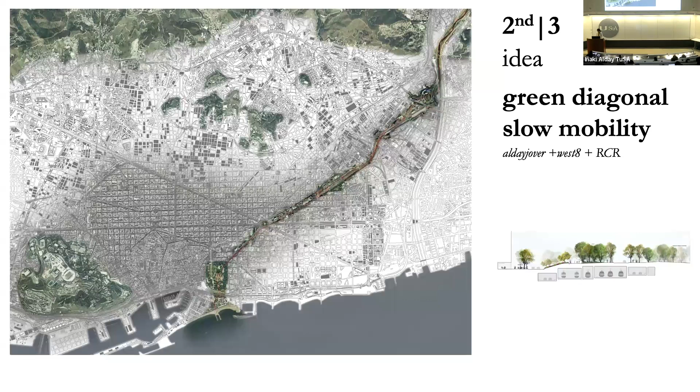You see the transversal section of this forested, multi-species landscape on top, but the point is the proposal goes beyond the site itself. That's the second idea, a green diagonal of slow mobility inheriting the traces of the Roman aqueduct and the medieval channel, with a historical reason for it to be.

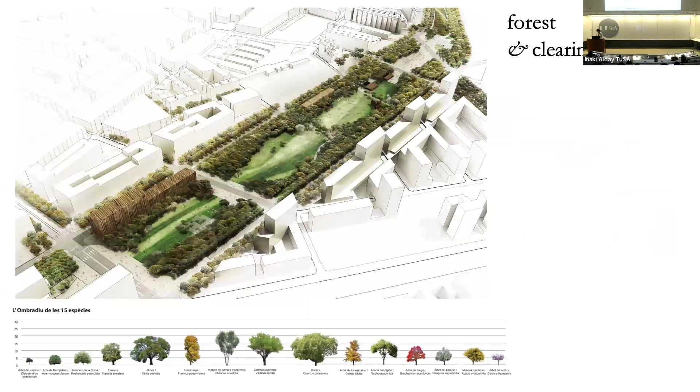At the scale of the park, this second idea is a sandy, curvy path that looks like a rural path traversing the city as if the city has cracked. This path traverses a forested landscape with clearings in between, and these clearings have different gardens in the middle.

The third and last idea of this big infrastructure is a series of fountains at different scales, from the small drinking fountain to the monumental fountain—a floodable plaza that gets two to three inches of water at ground level. It's a microtopography that gets flooded and unflooded.

In the territory, naturally, you have springs. People go to springs, and the springs have names—it's like a gossip place. Bringing this idea from the territory down to the urban park at another scale is the aim of this infrastructure of fountains. So these three ideas are carried at different scales, forming this green diagonal of slow mobility. It's curious to see how this idea is part of a heritage.

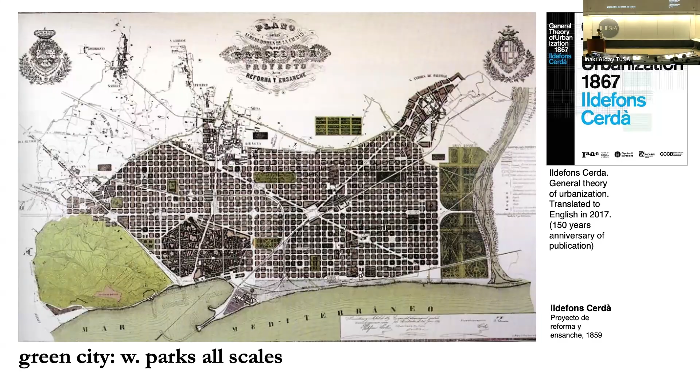That's the same city of Barcelona where a green diagonal, let's say, was somewhere here. The city of Barcelona has this well-known extension plan designed by Ildefons Cerdà, along with a general theory of urbanization in the 1800s. This original city was designed to be a green city—with L-shaped blocks, parks, and a lot of open space. But as you can see on the left, it ended up being a mass of cement with huge problems of heat island effect. It had also large parks planned, but they were never finally built.

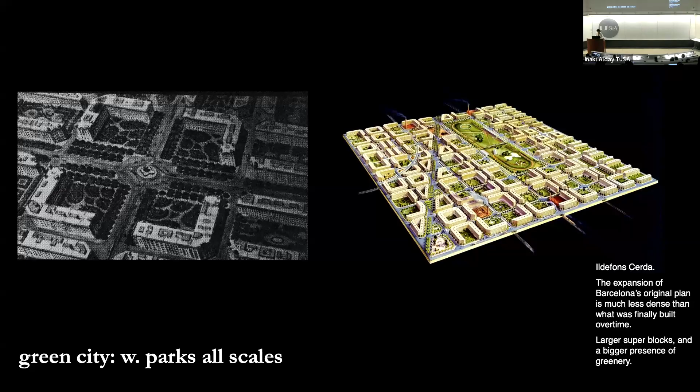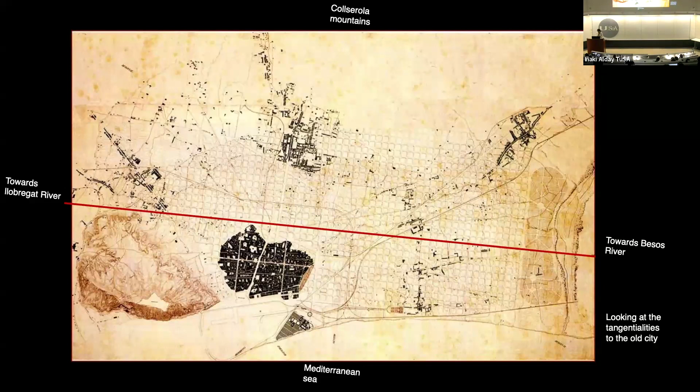The interesting thing is that Ildefons Cerdà himself writes a sentence in his general theory of urbanization saying these big thoroughfares he designed, 150 wide, aim to connect the city to the world. This idea of connecting the city to the world was interpreted by Le Corbusier in the 20th century as connection with the port, the airport, and infrastructures of mobility, because those were the obsessions of the 20th century—industry, airports, and the industrial model to connect the city with the world through moving goods.

But today, in the 21st century, in addition to those movements, we aim—at least in this project—to connect the city to the world through its connection with its geography and its landscape. That's the idea of this green diagonal of slow mobility.

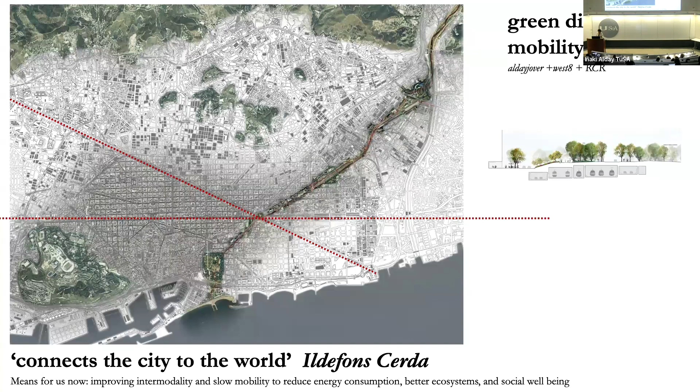To end with this last slide, a quote by David Cohn: the work is no longer strictly contained within the conceptual boundaries of the individual building or project as the principal object of design and study. Instead, the attention has shifted to the holistic overview of the habitat, of the environment, and its mix of urban and natural features as the true field of action of architecture and its ambitions.

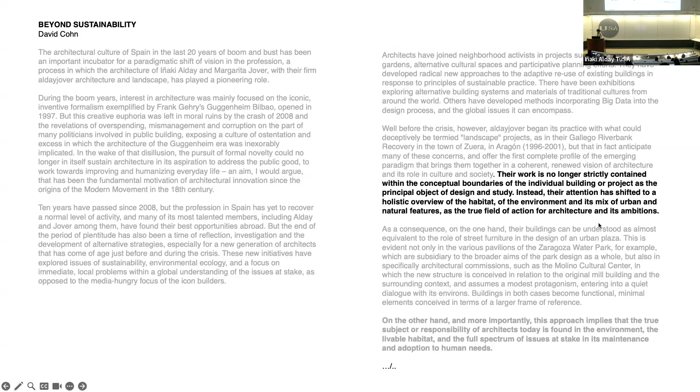So here is the book, and I hope you enjoy.

Margarita and Inaki, thank you very much. We have a few minutes, still good, still energy, lots of time. Any questions from the audience? You guys raise your hand, I can bring you the microphone. Everybody's always shy at first, and then we get overwhelmed with questions.

Nobody? I can walk to a student that I know. Okay, I see a question way up there. Give me one second, okay. Good, the people online won't be able to hear you. They'll be so sad, Liz. Okay.

I'll repeat the question. The question was, who initiates the projects that aren't competitions? Most of our projects are competitions, but no, actually the first project was not a competition. We don't have a special role, we just alternate. We are different, I'm more large scale, and you're more... Most of the projects are open competitions, and then you submit anonymously hoping to win.